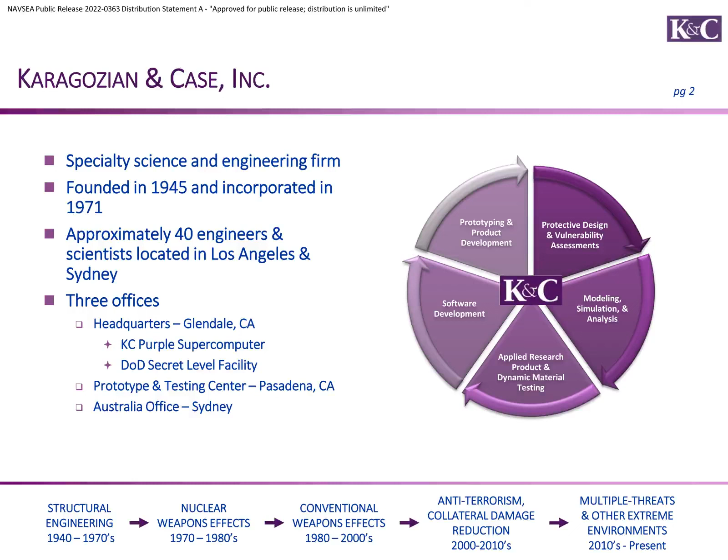The background for this project is that nearly 75% of Navy magazines greater than 500 square foot in plan area are Arch magazines, as shown to the right on this slide, and they were built in the World War II era, and they're ready to be replaced. As you might expect, there have been significant advances in materials and analytical methods since these original magazines were constructed. It follows, therefore, that this effort is meant to leverage these advances to develop a novel earth-covered magazine design that incorporates lightweight and energy-absorbing material.

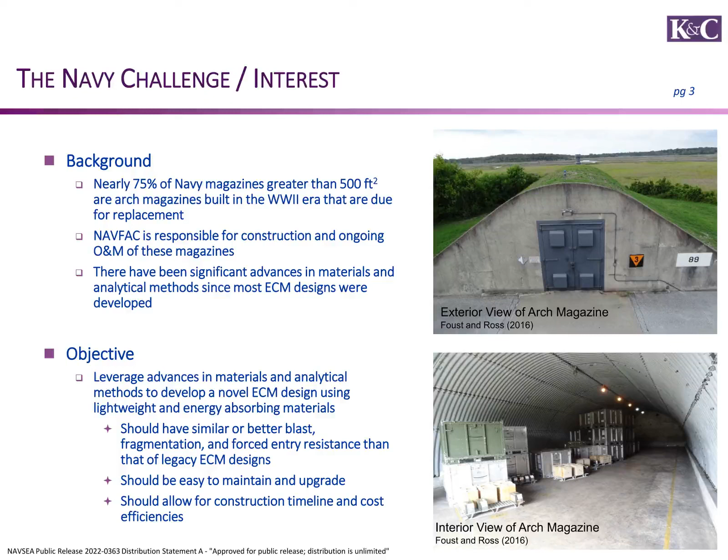The magazine should have similar or better blast, fragment, and forced entry resistance to that of the legacy earth-covered magazine designs. They should also be easy to maintain and upgrade. And finally, they should allow for construction timeline and cost efficiencies.

The requirements for earth-covered magazines are summarized on this slide and can be broken into two categories. The first, structural performance requirements, consist of environmental loads such as dead, live, wind, seismic, and blast loads. Typically, blast loads will govern the design of any earth-covered magazine.

To show that a structure complies with the stated blast load requirement, an analysis in accordance with UFC 3-340-02 must be performed. At this time, FRP and plastic foam materials are outside the scope of the UFC. And as these materials are included in the lightweight foam composite concept, that means that an analytical methodology that can be approved by the Department of Defense Explosive Safety Board must be developed under this effort.

In addition to the structural performance requirements, non-structural requirements defined in the DESR 6055.09 must be complied with as well. These requirements include fire protection, physical security, lightning protection, and environmental resilience. In addition, the design must consider operations and maintenance costs.

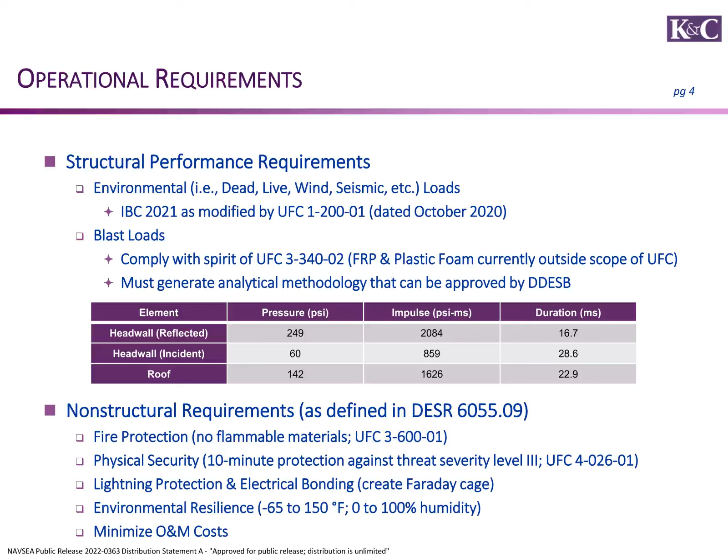The technology developed under this effort is referred to as the lightweight foam composite earth-covered magazine. It consists of fiber-reinforced polymer beams that are spaced at 2 to 3 feet on center that are resting on a rigid polyurethane foam bearing pad. The bearing pad is meant to absorb energy and also support the FRP beams. The materials, the FRP and the foam materials, were specifically selected to be durable, corrosion resistant, and fire retardant.

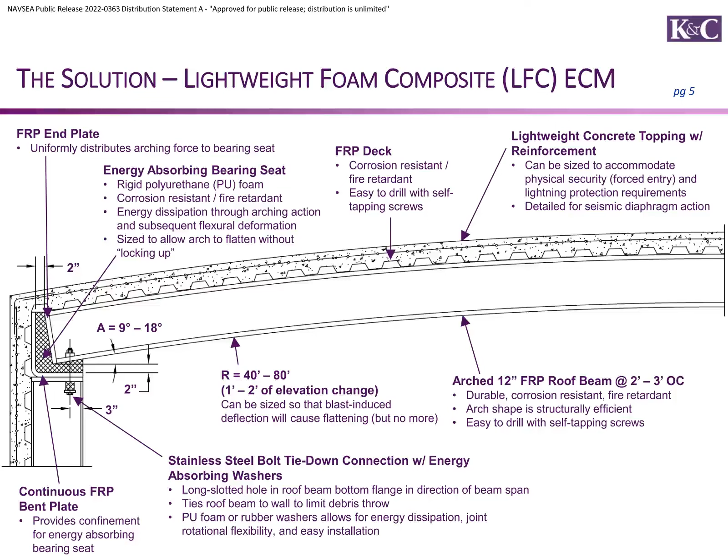Encapsulating the whole system, specifically for forced entry and lightning protection reasons, is a lightweight concrete topping with mild steel reinforcement. The concept works by leveraging the slight arch geometry of the FRP roof beam to resist a significant external blast load. As a blast load strikes the external surface of the LFC ECM roof, an arching force is imparted to the FRP beam, as shown with the blue arrow.

This arching force is resisted at the bearing pad, first by the vertical leg, and then, as the beam is pushed downward, in the horizontal leg of the bearing pad. Both portions of the bearing pad are designed to crush prior to the FRP reaching its compressive strength. Thus, energy is absorbed through crushing of the foam bearing pad. The steel reinforcement in the topping is used for continuity and to tie the system together during large deformations.

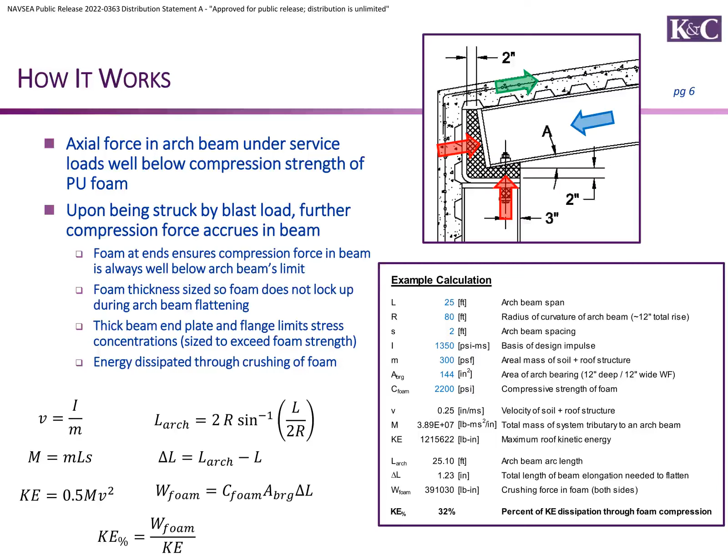As shown on this slide, very simple calculations can be used to quantify the amount of energy that is dissipated through the bearing pad crushing. Key features of the LFC ECM are shown on this slide.

First and foremost, the LFC ECM is meant to be modular, such that a bunch of roof panels can be constructed in the factory, stacked, and placed in a Connex box and shipped anywhere in the world.

In addition, the installation process for the LFC ECM roof panels is meant to be very simple. All that is needed is to set the bent plate in the foam bearing seat, drop the panels onto the foam bearing seat, secure the anchor bolt at the foam bearing seat, and install side-lap connections between the various panels.

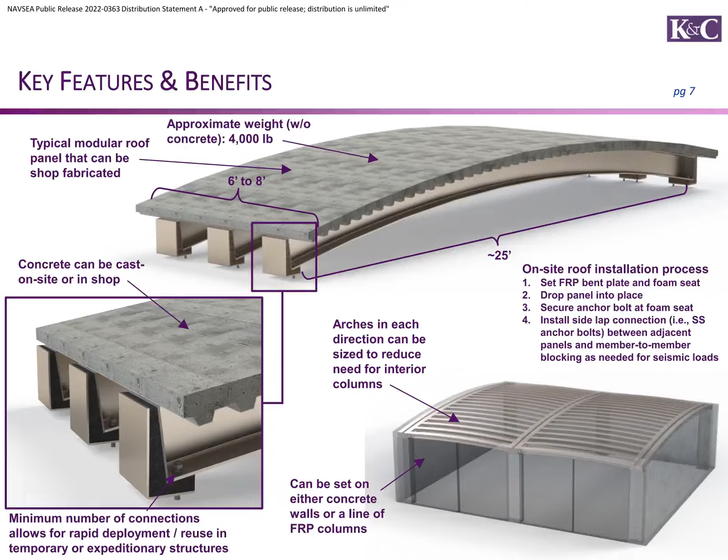Although originally designed as a single bay roof structure, this system can be easily modified to make multi-bay scenarios a reality. The status of the development of the LFC ECM is shown on this slide. At this point, we've developed an analytical model of the LFC ECM and verified that it's capable of capturing the static response of the LFC ECM's roof panels.

The next step is to perform dynamic testing. This could be either blast testing or drop hammer testing in a lab setting to demonstrate that the analytical model is capable of reproducing the dynamic response of this system. Pending successful dynamic testing, we'll plan to do 100% drawings, specifications, and calculations that can be submitted to the Department of Defense Explosive Safety Board for approval.

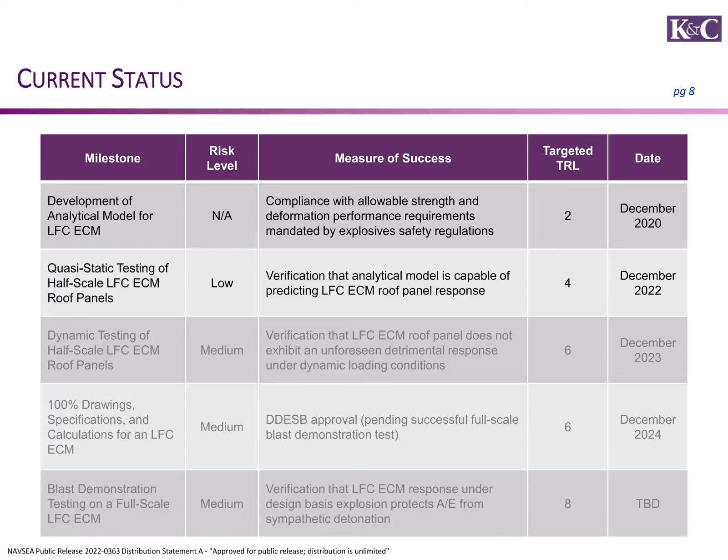Although a timeline has not been decided yet for a full-scale blast demonstration test, speaking with DDESB to this point, we know that for the LFC ECM to be fielded, we will need to do a full-scale blast demonstration test of the system. As mentioned on the previous slide, approval by the DDESB is of utmost importance. If DDESB approves, the LFC ECM can be placed on the list of approved magazines, which opens up its use for a variety of owners and installers.

However, it should be noted that the DDESB currently has no protocol for using high-fidelity physics-based calculations to support protective construction designs, nor protective construction guidelines for FRP and foam materials. Both of these elements are essential for the adoption of the LFC ECM and are the main reason why these activities play a central part in the current Phase 2 effort.

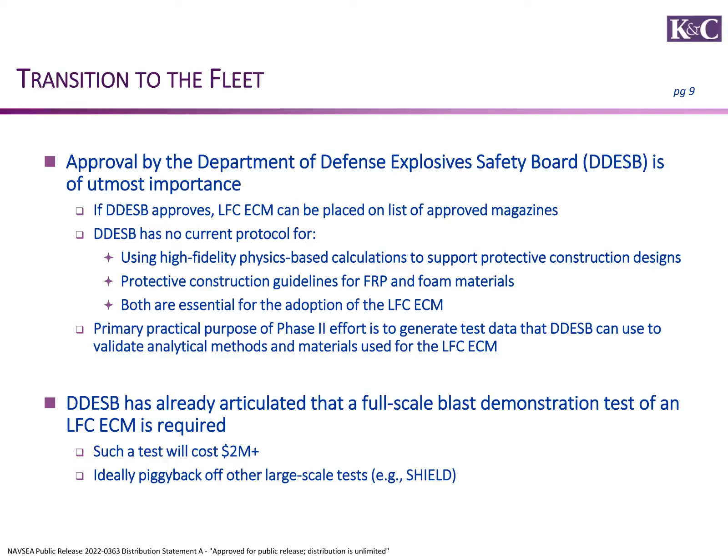The key deliverable for the Phase 2 effort are the 100% drawings, specifications, and calculations for an LFC ECM, which will enable it to be listed on the list of approved ECMs, pending, of course, a full-scale blast demonstration test. K&C has been coordinating with various government and non-government stakeholders via conferences and trade shows concerning the LFC ECM concept and intends to do so for the foreseeable future.

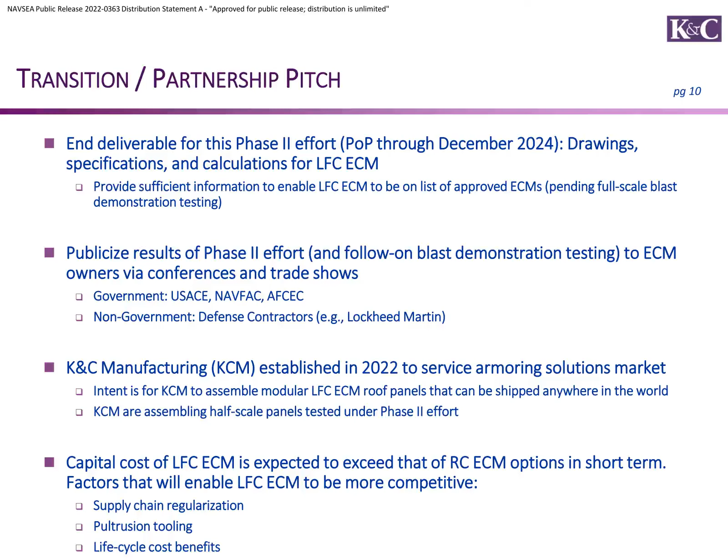K&C Manufacturing, which was recently established, will enable the LFC ECM roof panels to be made expeditiously and shipped anywhere in the world. And in fact, KCM assembled the half-scale panels during the Phase 2 effort. Finally, while the capital cost of an LFC ECM is expected to exceed that of the reinforced concrete options in the short term, various factors will help move that cost down in the long term, namely the life cycle cost benefits that are associated with the LFC ECM, the introduction of pultrusion tooling, and supply chain regularization after the COVID-19 pandemic.

So why the LFC ECM? I'd say it breaks down into three main points. First of all, it's lightweight, and this lightweight will help reduce shipping costs and also the hazard produced by secondary debris deriving from an LFC ECM. Second, superior O&M. The LFC ECM is constructed totally of corrosion-resistant materials, and can be employed in harsh environments. Additionally, its modular nature allows for rapid installation and easy replacement, and also its connections do not require welding.

Finally, energy absorption through the slight arch and the energy absorbing bearing pad makes for a very efficient system from a structural performance perspective while still meeting the blast resistance requirements of earth-covered magazines.